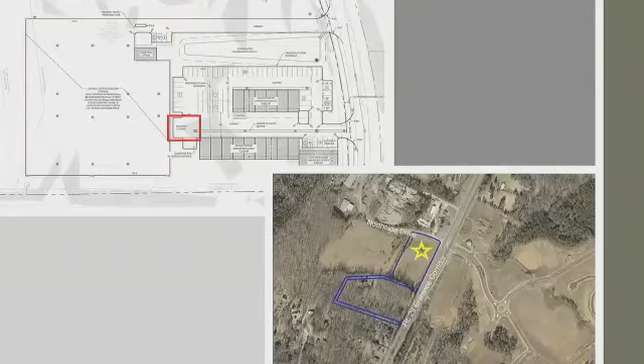Architectural drawings were not submitted with the initial plan, but the site plan shows the backs of the customer lobby and one of the garage buildings will be oriented towards the entrance corridor. Typically, the backs of garage buildings are blank and utilitarian, so careful attention to forms, materials, and detailing will be required. Landscaping will also likely be needed in the available planting area between the building and frontage landscaping to soften the appearance of exterior walls.

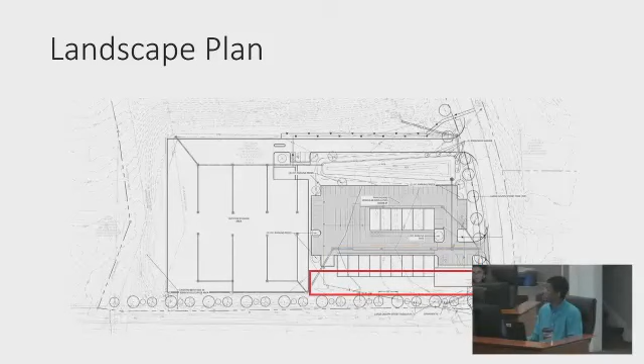Regarding the layout of the site, the outdoor storage area associated with the vehicle repair portion of the development is shown in a location that is along the entrance corridor. Staff recommends moving the storage area behind building D to be more consistent with the guidelines. Screening will also be needed to eliminate visibility from Northside Drive.

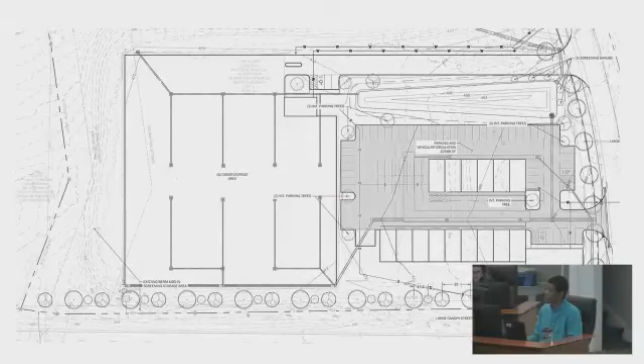There are a few landscaping issues noted with the plan submitted that also will need to be resolved. The frontage trees and some of the interior road trees shown appear to conflict with existing and proposed utilities. The west perimeter parking lot lacks trees due to the stormwater facility being located too close to the lot, and the required amount of interior parking area trees has not been provided.

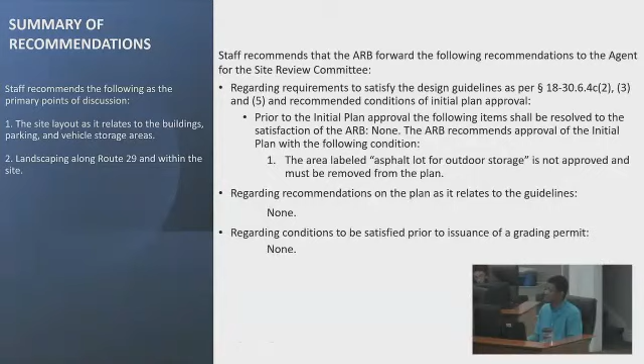Staff recommends approval of the initial plan with a condition: the area labeled asphalt lot for outdoor storage is not approved and must be removed from the plan. I'd be happy to answer any questions you all may have. All right, thanks a lot, Chris.

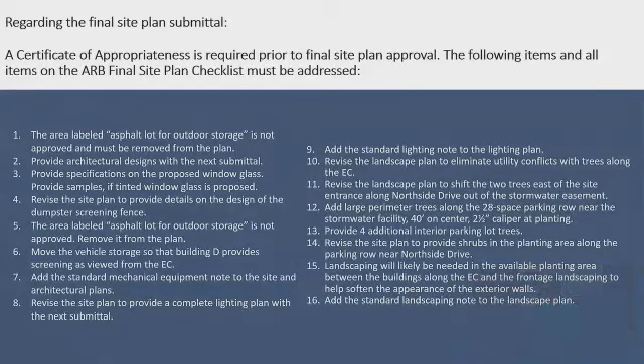We'll go through and see if anyone has any questions. Tara, do you have any questions? No, but thanks, Chris, for your presentation, appreciate it. Dave, do you have any questions? No questions, thank you, Chris.

I just have one clarifying question. The storage area that's not allowed, that's just not a topic of conversation today, like if it was relocated or anything? Correct. The wording in the zoning was that it needs to be consistent in scale with, or associated with, the vehicle repair use; at the scale shown, it's kind of obvious it's not associated with the vehicle repair use. Right, okay, thanks, that was my only question.

Yes, it's time for the applicant's presentation, if the applicant is here and has something to present.

Good afternoon. I'm Daniel with Line and Grade Civil Engineering. I'm a civil engineer, not an architect. I had no other additional information to provide other than what Chris shared with you, but I can answer questions if you have any more specific or context-oriented questions. There's no further presentation.

All right, thank you. So we'll see if any members have questions for the applicant. Dave, do you have any questions? No, thank you, Chris. Tara, do you have any questions?

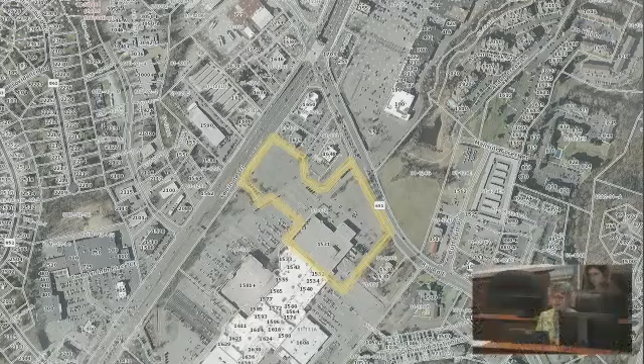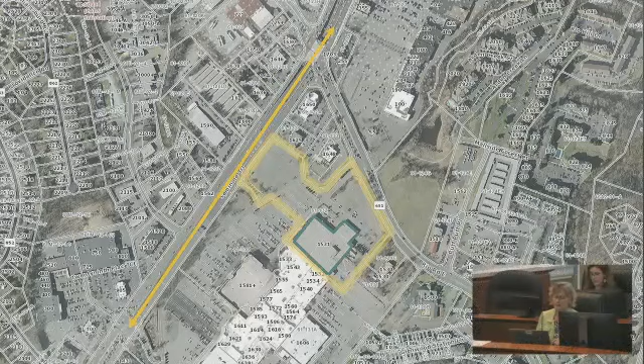All right, our second regular review item today is SP 2023-37, Home Depot Outdoor Storage, Display and Sales. Margaret, do you have your presentation? Yes, thanks. This is an advisory review for a special use permit for the Home Depot store. You'll recall that you reviewed and recommended approval of the initial site plan in May. As a reminder, the site is located at the north end of the Fashion Square Mall, where the Sears store is located. The site falls within two entrance corridors: Route 29 to the west and Rio to the north, and the site is visible from both corridors.

Today, you're considering the applicant's request for outdoor storage, display, and sales of lawn, garden, and related merchandise. Although some of the images in this submittal show the main store building, the design of the main building is not under review today. In September, Home Depot will be back for that review.

One other thing to note: the drawings and the content for today's review of the special use permit evolved during the review of the project, really up to the last minute. So it's possible that I have a few details wrong in the staff report and in this presentation. I apologize for that if that's the case, but I'm sure the applicants will be able to clarify and provide whatever additional details are needed.

This particular SP is required specifically because of the location in the entrance corridor overlay. The review is limited to determining whether the outdoor storage, display, and or sales is consistent with the design guidelines. In other words, will the display result in an appropriate appearance for the entrance corridor?

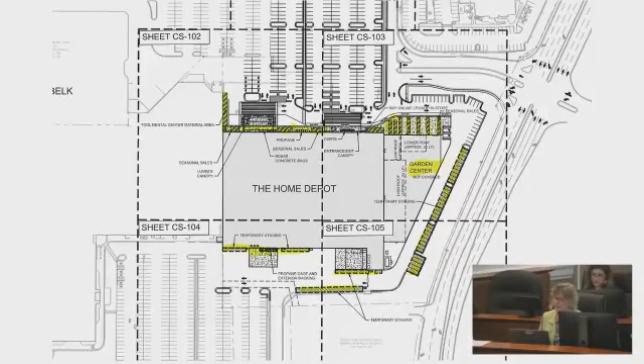The areas of display are the garden center itself, which is adjacent to the Rio entrance corridor, outdoor areas along the front of the garden center and along the main building, behind the building, and extending for a short portion along the existing building. The areas behind the building are not expected to be visible from the entrance corridor. A view down onto the garden center is expected from the sidewalk along Rio Road, much as the current view is down onto the Sears building.

The outdoor areas are expected to be visible from Rio across the entrance into the site and from Route 29, though that would be at a distance. The garden center has an entrance feature on the Route 29 side and fencing that extends from the entrance feature to both sides to enclose the garden center area.

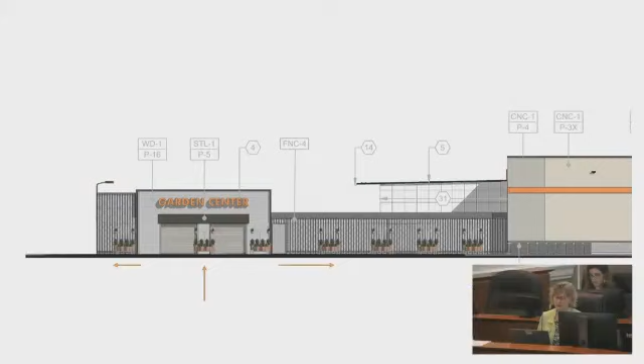The fence design changes depending on location. Materials include vertical metal fence, expanded metal mesh, black fabric mesh, and black chain link. Not every material is used in every application, and when multiple materials are used, they are sort of sandwiched together. The chain link is used as part of the composition at the upper part of the fence on the side that parallels Rio Road. The layered design could sufficiently reduce the noticeability of that chain link.

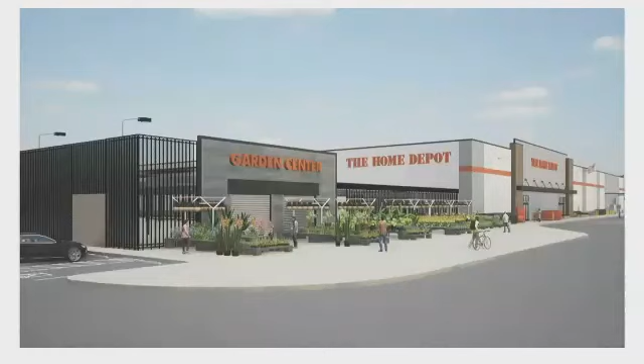Because the design uses chain link, because this exact fence design doesn't yet exist anywhere that can be viewed, and because there will be some visibility through the fence into the garden center, we recommended that a mock-up be provided for ARB review. We recommend that it be provided prior to building permit approval, but you may prefer an earlier deadline.

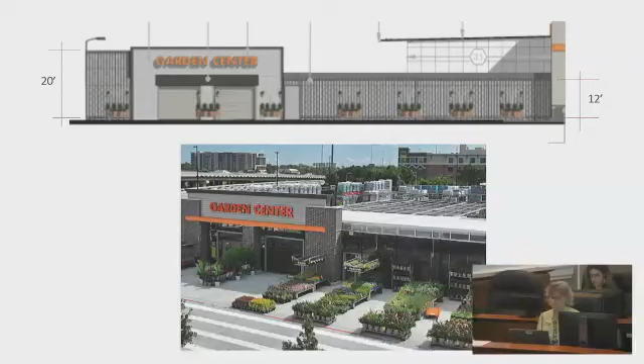Another fence-related issue is the height of the fence. It's 12 feet tall on the Route 29 side of the building and 20 feet tall on the Rio side. Some garden centers stack products higher than the fence that encloses the space. This creates a disorganized, disorderly, and unattractive appearance, so limiting the height of stored products to the height of the fence would be appropriate. But the fence heights vary here, and depending on layout, products stored at the taller 20-foot fence height might be viewed above and beyond the 12-foot fence.

Viewers would probably need to be standing at a distance to see that condition, but a consistent fence height could resolve that problem. We've recommended a condition of approval that products must not be stored higher than the shortest garden center fence.

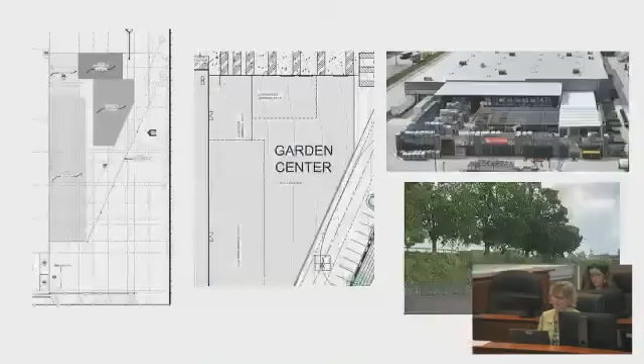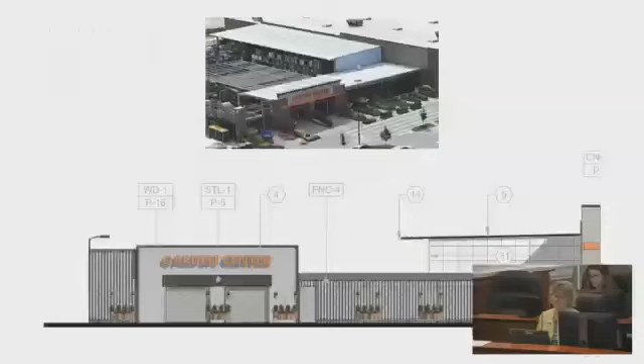The garden center is partially enclosed at the top. The elevated position on Rio Road above the site will allow the enclosures and the interior areas of the garden center that aren't roofed to be visible from Rio Road. The enclosures are a combination of retractable black mesh over the central area and white pre-finished metal canopies set at varying heights. A portion of the garden center is enclosed with vertical translucent fiberglass wall panels.

The fiberglass will appear to glow when lit from the interior at night. That's an effect that would not be appropriate for the entrance corridor, and a change to that material is recommended.

The garden center is part of the Home Depot big box design. It's a version of a trademark design. The garden center and the display have no connection to the historic architecture of the county. Given the immediate context, that connection may not be as important as some of the other aspects of the design.

This redevelopment, however, is an opportunity to meet the guideline that states that landscaping can provide continuity along the corridor and allow for more flexibility in the building design. Route 29 does not currently have any of the standard entrance corridor frontage planting on this parcel. Given the extent of the redevelopment and the requested special use, we've recommended that the planting be provided.

There are a few other landscaping issues. One is screening proposed along the Rio Road frontage to address the visibility of the storage and display. The Rio frontage is relatively narrow. It includes a planting strip with a guardrail at the street edge and some existing mature trees. There's a sidewalk and then another guardrail before the ground falls away with a steep slope down to the mall parking lot. For the screening along the Rio frontage, there's a landscape proposal and a buffer alternative.

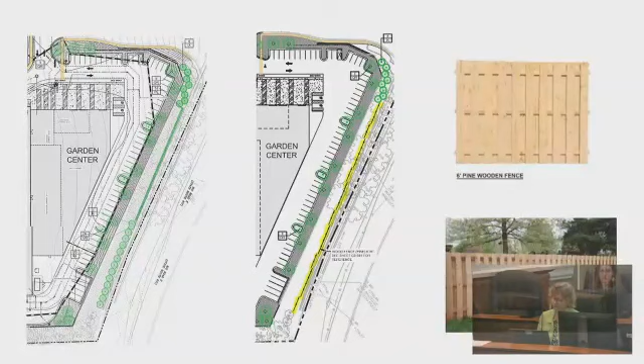The buffer alternative consists of a solid wooden fence. The fence of that design would be out of character in this location, and we've recommended a landscape-only solution. However, there is concern that there's not sufficient planting area to accommodate the landscaping that's proposed, so we've recommended that a detail be provided to show that it can be done.

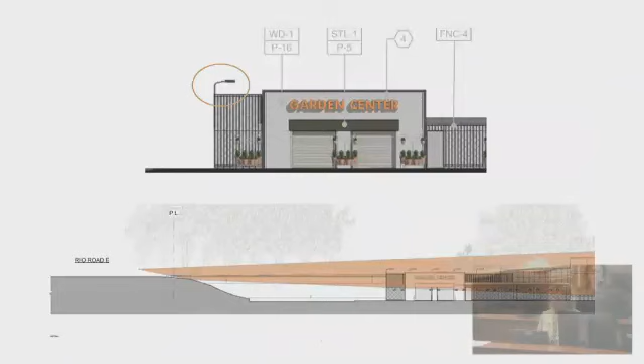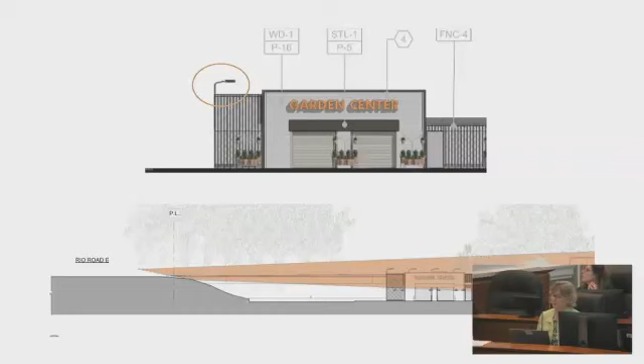There are a few lighting issues related to the outdoor display. There are fixtures mounted at the top of the garden center fence pointing down into the garden center. Those fixtures are proposed with a color temperature of 4000 K, which exceeds the guidelines. There are no light fixtures shown illuminating the exterior of the garden center or outside storage areas. To ensure that the display areas are not over illuminated, we've recommended that outdoor illumination be limited to 20-foot candles maximum, which is typical in the entrance corridors.

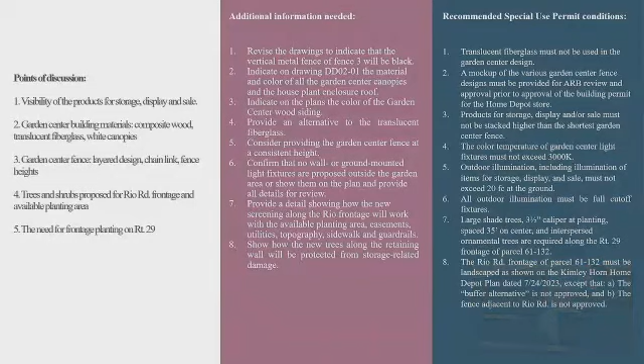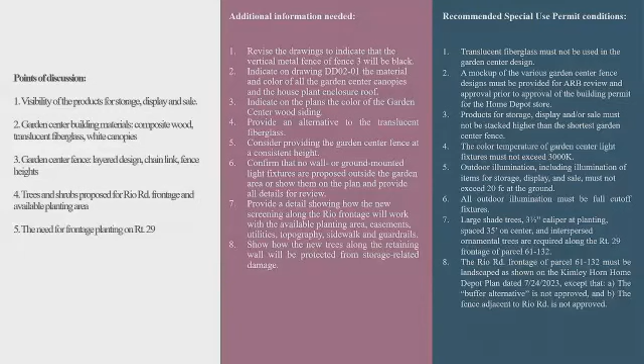That covers most of the issues identified in the staff report. Your recommendation on this proposal will be forwarded onto the Planning Commission and the Board of Supervisors. In the staff report, we listed two sets of comments. The first is recommended additions or changes to the drawings to clarify points of design and confirm that an appropriate appearance will be achieved. With these requests for outdoor display, typically when changes are needed in the drawings, we recommend that you see the revised drawings prior to taking action. If you don't feel those issues identified in that first list are that significant, you could forego them or leave them for staff review prior to the proposal moving on to the Planning Commission.

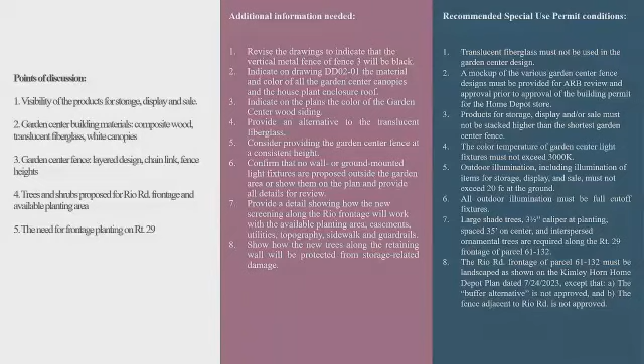The second list is recommended conditions for the special permit. They aren't necessarily changes that need to be made to the plans right now, but are conditions that would run with the special permit. In addition to general discussion about the proposal and its visibility, there are a few specific items we recommend you include in your discussion today: the building materials, including the fence designs, the available planting area along Rio Road, and the need for frontage planting along Route 29.

And that is the end of my presentation. I'm happy to answer any questions that you might have.

All right, thanks a lot, Margaret. Tara, do you have any questions? No, thank you, Margaret. Dave? Thank you, Margaret, for the thorough report and presentation. No questions.

Thank you, I guess I had one question. The translucent fiberglass, it looked based on some of the images that it occurred on some of the roofs also, is there a problem with that, or is it just that vertical expanse of it? It was my understanding that it was just that vertical piece that was translucent, and that the roof pieces would be opaque, but I'm sure the applicants can help us with that. All right, thanks, that was my only question.

So now is the time for the applicant's presentation, if there's a representative here.

Good afternoon, my name is Corbin Rowe. I'm the real estate manager for Home Depot Northeast US. We've been looking to get a store here in Charlottesville for almost 20 years now, so a long time in the making. We're happy to be here in front of you considering the site plan and everything about it. I think the team we have here can answer all of your questions and go through it, and we appreciate the opportunity to listen to us. Thank you. All right, thank you.

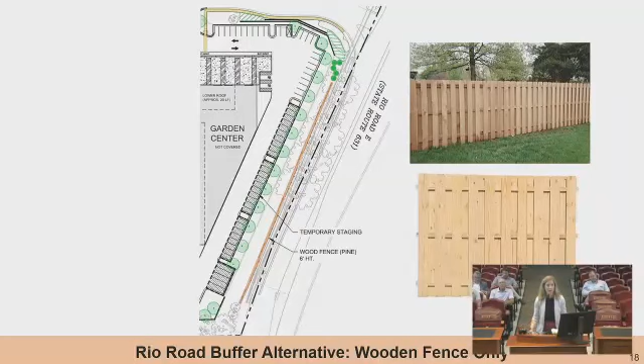But if it were the preference of the ARB and ultimately the Board of Supervisors that visibility of the garden center and display products be completely eliminated, there is an option for that with this wooden fence or some other material. We did not expect that would be the preference, but wanted to show it as an option if preferred.

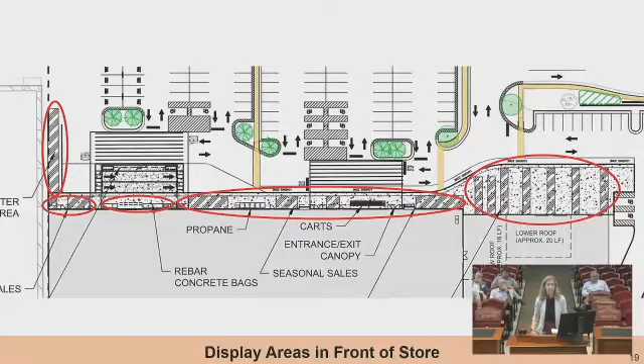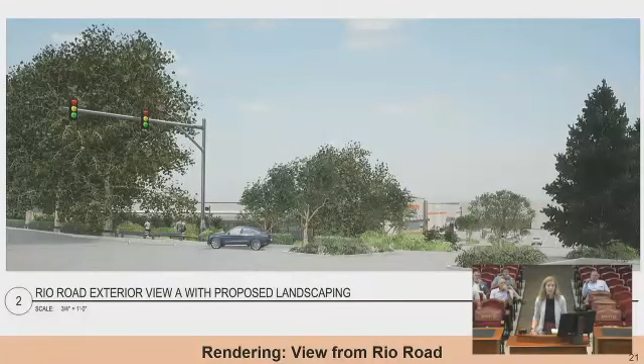As you can see, that does help fill in those gaps a little bit, but certainly the store and portions of the garden center fence will still be visible. I think the views will be mitigated substantially with the combination of the new plantings as well as the proposed materials.

Just wanted to show all the elevations. We're happy to come back to any of these where you may have questions.

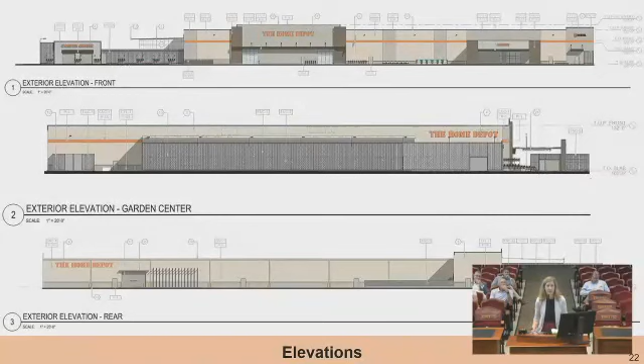I'm going to be talking about the fencing. This is the view from Rio, with a certain design of fencing here, and a slightly shorter fence here, as Margaret noted, with a slightly different proposal there. And then finally, this is the tool rental center I mentioned, which might be visible at a distance from Rio because it's up against the old existing Sears building.

Again, this is the fence from the front elevation, and from the side, looking at that tool rental center in the distance. One element, which I'll show you images of to explain, is this fence will have two layers. The difference between the two is that on the bottom half, there is some security metal mesh fencing.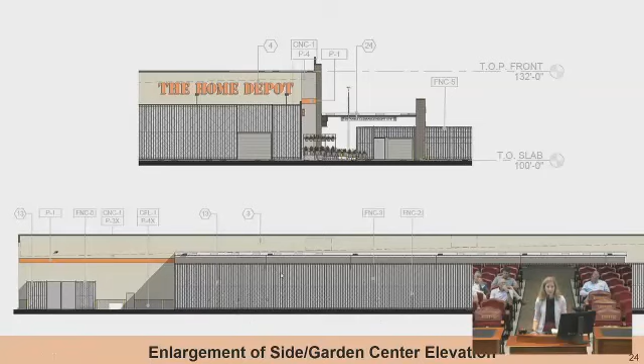I have a close-up image - it's kind of like a very tight weave chain link. On the top will be chain link. Both will be coated in the black material. We'll also have a vertical decorative metal fence along the entire span.

The challenge is I don't have a picture to show you exactly what Home Depot is proposing for this site, because they're proposing something they've never actually built anywhere else. So what we're trying to do is show you various combinations and ask you to understand how it would look. On the far left is a picture of a fence with the vertical metal fencing and the chain link behind - this is the tight weave security expanding metal mesh, a close-up of it.

This is the front of a store. You can see again, the frame of reference is the panel we'll talk about in a moment. This material only is on the front of the store. I think it does a good job of showing how that material helps screen and minimize the view into the center itself. And finally, some black metal mesh material would be added to the side of the fencing on the Rio Road side to help further screen the materials. So then I'll walk through each option.

This is the tool rental center that's just to the right of the front. You'll see this at a distance, but it would be visible.

On the bottom is this metal mesh security fencing. On top is the chain link, and then the metal mesh behind. It will also have the vertical metal decorative fencing. So there are 3 layers: the metal vertical decorative on the outside, the chain link in the middle on the top half, the expanded metal mesh in the middle on the bottom half, and the black fabric mesh material along the entire portion of the fence. That's the same sequence for the large side along Rio Road.

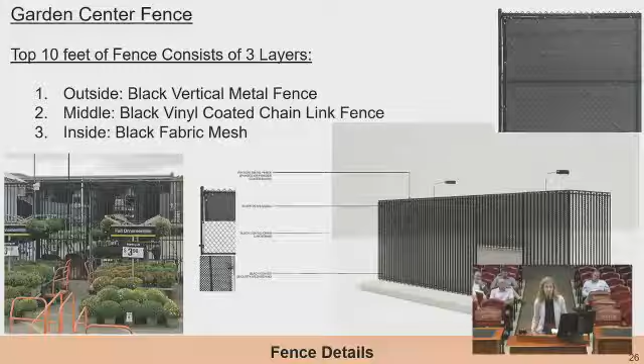This is some close-up photographs from the Waynesboro store that I took to provide local options. Obviously a very different store - they don't have an architectural review board, so those orange panels are not proposed. I wanted to show what the metal mesh looks like up close.

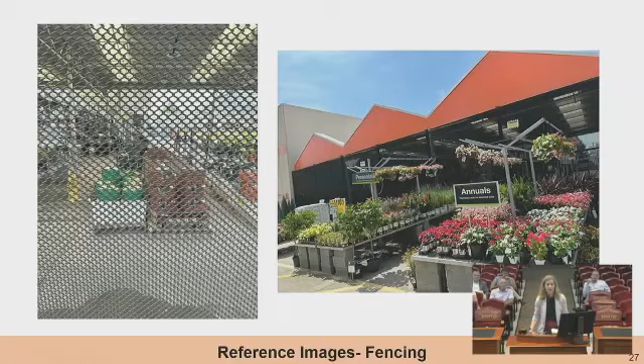This picture was taken from this exact spot, looking in, showing that it does help mitigate the views into the garden center, particularly from a distance where it appears darker.

These are photos of the fencing in Waynesboro, very different in many ways from what's proposed here. Most importantly, this does not have the vertical metal decorative, nor does it have the black mesh material on the inside. But this is what would be in the middle at the store here in Charlottesville - you can see the difference.

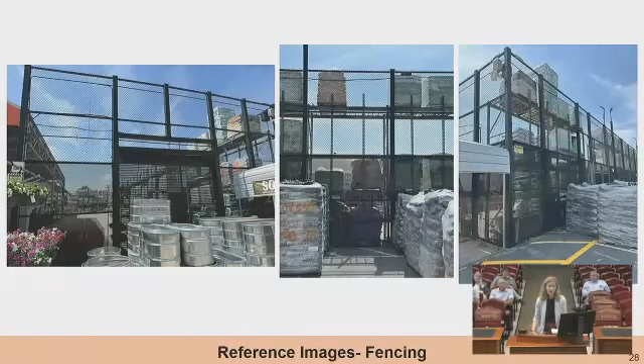This is the metal mesh, tighter weave on the bottom, and standard chain link on top, both in black. So this would have the vertical decorative metal fence on the outside, this material in the middle, and the black mesh fabric on the inside. I wanted to show this as an example of how it looks from a distance.

Here's some temporary staging. There was a question about trees being located next to temporary staging areas, so I took some pictures. It's not always very tall things - sometimes it's smaller items like that.

This is taken from inside the store at the Garden Center in the Waynesboro store. The material for the roofs over the Garden Center would be a white metal material with translucent fiberglass inserts as shown here. I recognize we did not clarify that in our application materials. We have the architects from Home Depot here who can talk more about why they proposed that alternative - it allows light to come through for the plants and other materials, helps reduce electricity costs, among other things. That is what we're proposing, and we appreciate your feedback on that.

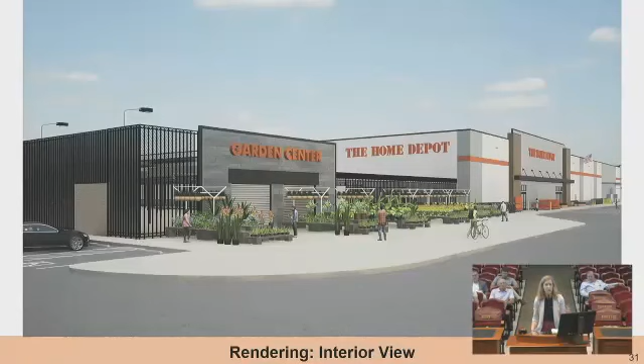This is a rendering of the Garden Center with the proposed materials. The fencing along the front - this is a 12-foot fence - and this segment of the front fence, which is 20 feet, would have the vertical decorative metal on the outside and the various types of chain link, the smaller security mesh on the bottom and the standard chain link on top. These segments of fence would not have the black mesh material, since Home Depot wants customers to be able to see in a little bit as opposed to screening it entirely. By contrast, over on the Rio Road side would have the black mesh material to help create much more of a screening of that area.

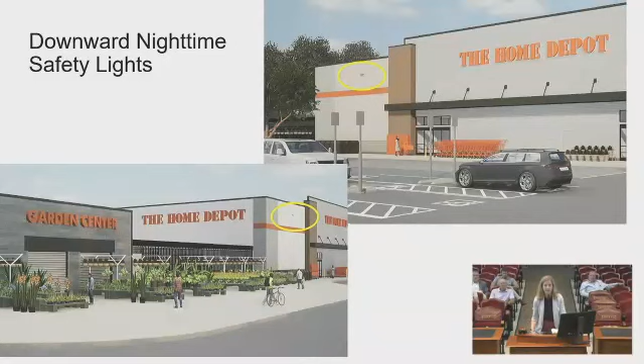There was a question about whether there were any lights on the building to illuminate the display items. There are not - there is standard wall pack lighting for safety. We can call those out on the plans, but they're not intended to illuminate the display items.

This is just some images of another store to help better demonstrate the relationship of the canopies, the various heights, and the materials relative to the Garden Center entrance. Again, this is that same material - the small mesh security and expanding metal mesh material along the front, much as it is at the Waynesboro store - just to give an idea of how that works.

Home Depot does have concerns about having a uniform fence height around.

They like the idea of having it vary in height, shorter here at 12 feet in the front, then going all the way around at 20 feet above. That allows them to stack materials without exceeding the top of the fence. Over here, where they're not stacking materials, there's a roof, so that's not an issue, and it won't be as imposing a height on that side of the building.

I think it would be challenging for someone standing over here, or further back, to see over this fence and roof to the materials at the back. Certainly if you're walking from Route 29 you may see them at a distance, but we think all the various measures together, including new trees, will help mitigate that visibility.

This is a similar image to what you'd see from the Rio Road vantage point, very similar in terms of roof canopy location and structure. That one looks a little blue on the roof, but it would be white. And again, a different angle showing that.

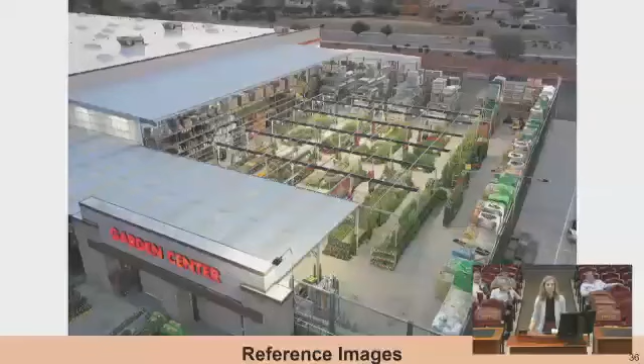In some of these images, Home Depot shared with me that the roofs, or canopy covers, look brighter. Part of staff's concern was that they would glow at night, but I'm told these images were intentionally taken at dusk, when it would be most visible, because they like to show it that way. It would not necessarily be the same with the Charlottesville store. I just wanted to point that out.

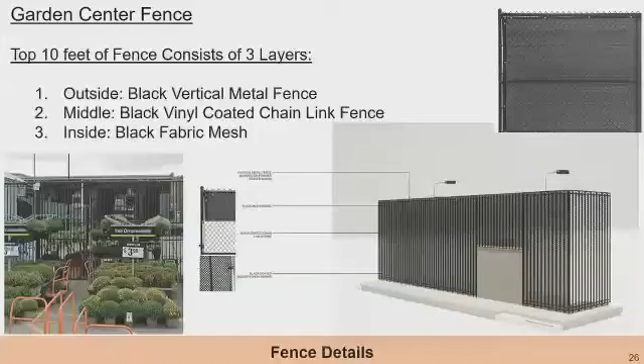I think that's everything there. I do have a couple of responses to some of the staff comments, if now is the appropriate time. There are many we're comfortable with, a few we'd like some modifications to. I'm happy to answer questions first or go through those, whichever you prefer. I think if you want clarifications, that might eliminate unnecessary questions. So, I've covered some of them already.

The first is about the comment on this translucent fiberglass material here. Staff recommends it be replaced with a different material, out of concern that it would appear to be glowing from the entrance corridor. I'm happy to have the Home Depot reps and architects address that issue, but we think it will be okay.

The lighting inside will not be uplit toward that panel, it'll be downlit into the store. The translucent material helps allow light in onto the materials and into the garden center during the day, reducing electricity use. If the panel is visible from Route 29, it will be at quite a distance, over 700 feet, and there will be a number of new trees planted in the parking lot that aren't there now, as well as shrubs, possibly trees, along Route 29. So we'd like to leave that material if possible, and we'd appreciate your feedback on that.

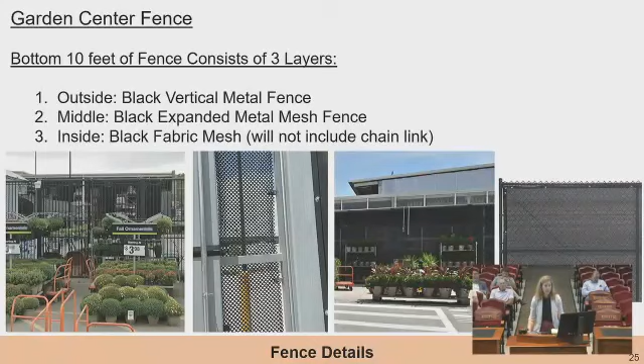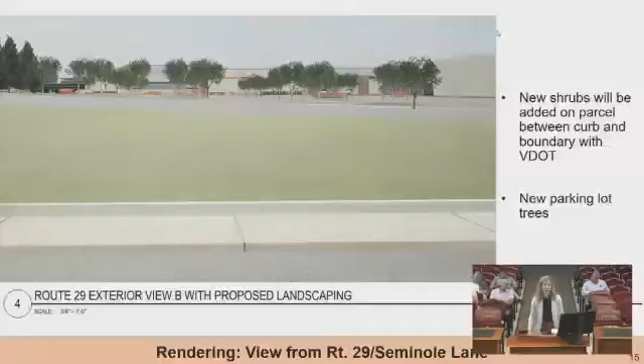I talked a little already about trees along 29, for Mr. Stoner's benefit I'll go back to that slide, right here. Much of the green grass strip that currently exists between the Route 29 northbound lanes and the parking lot is just grass, with no plantings of any kind.

Much of that area is in the VDOT right of way, so what we're proposing, at minimum, is to put some shrubs within the space between the right of way and the edge of the existing parking lot, or trees if possible. The rest of the mall will be redeveloped as part of the next phase. So we're trying to avoid, one, the challenging constraints of the right-of-way location, and two, tearing up that parking lot unnecessarily and putting something back that would just be torn up again in a few years. We'd appreciate your feedback on that issue.

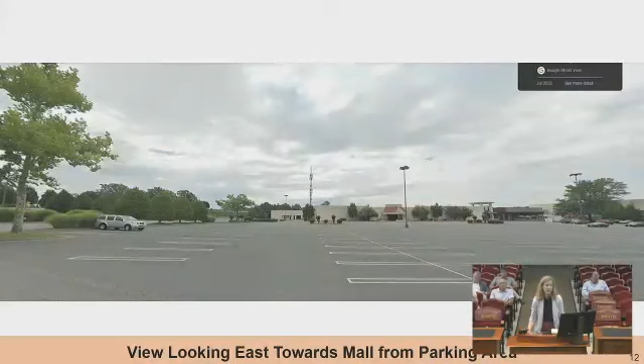So that was on that issue. We'd love your feedback on that.

With regard to the two lighting issues, one was about the color temperature, whether it was 4,000 Kelvin or 3,000 Kelvin. They would prefer 4,000. They tell me that's fairly standard in commercial projects. The 3,000 is what you're looking for. I think they can make that work. They may want to talk with you a little bit more about that.

And then with regard to the limit on foot candles, whether it's 20 or 30, I noted in the guidelines that it does say up to 30 is appropriate for display lots. So we would like to maintain 30 foot candles along the front display lot.

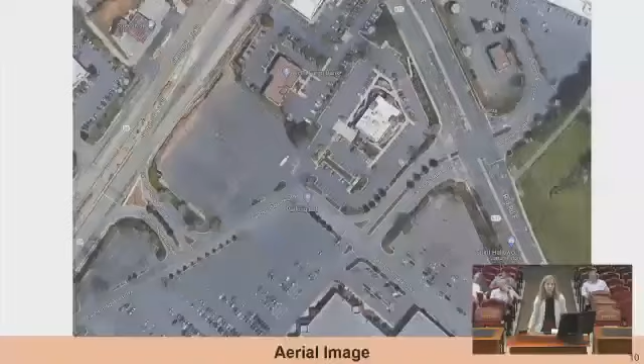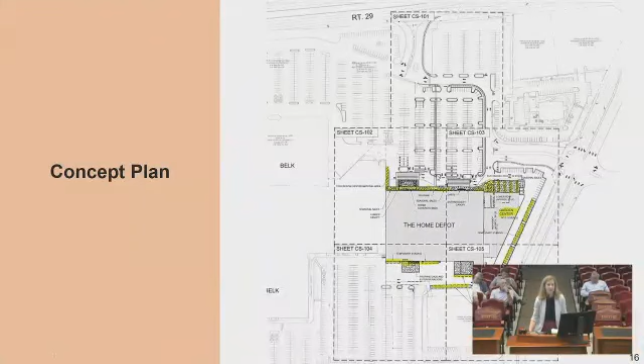Let me go back to that image. It's fine to have 20 in the other locations. So we're asking to maintain 30 in the front, just because you have staff members and the public coming and going in the evening. You have a travel way here, there's curbs, materials in there. We think for safety reasons it's more appropriate to have 30 foot candles there. It's not intended to be about lighting the display items, but for safety. By comparison, these areas in the back, 20 is fine because most of the work involving those temporary staging or storage areas takes place during the daytime, and they don't have as much traffic flowing in front.

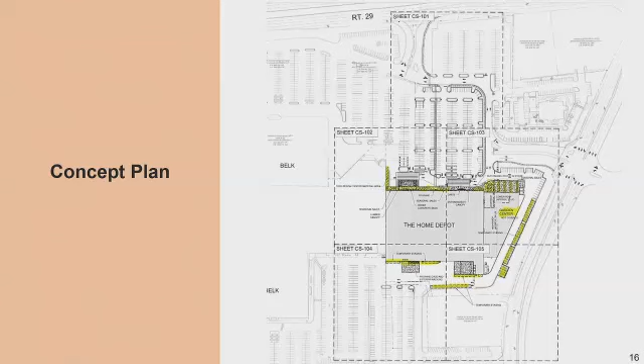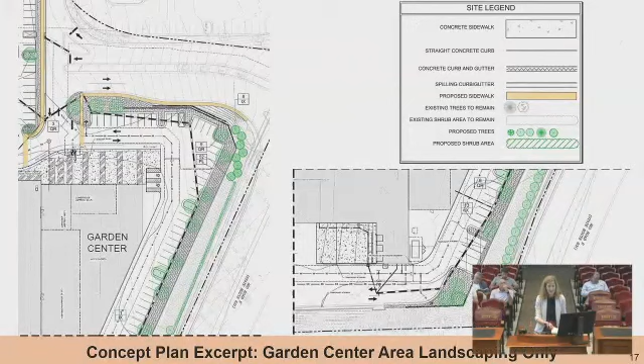We talked about the roof material a little bit already. We'd like to be able to use the same white metal roof with the translucent fiberglass insert panels to allow the light in. Again, the lighting is not uplit, it's all downward facing. So while the roofs would be visible, we think they can be mitigated with the existing and proposed additional landscaping. We would welcome your input on that.

And regarding this planting area along Rio Road, Kimley Horn, the project engineers, have confirmed they are very confident that what they propose, there's room for it. They've taken into account both the underground utilities and the overhead utilities. These will, obviously, my cursor—

There. These are small shrubs that can work in that location. And then there's one holly here, and then that row continues here. This is where the maple trees don't currently exist, largely because of the overhead power lines, but these hollies can be planted. The height at planting can help mitigate the views of the garden center, but even though they'll grow to a nice height, they won't interfere with those utility lines.

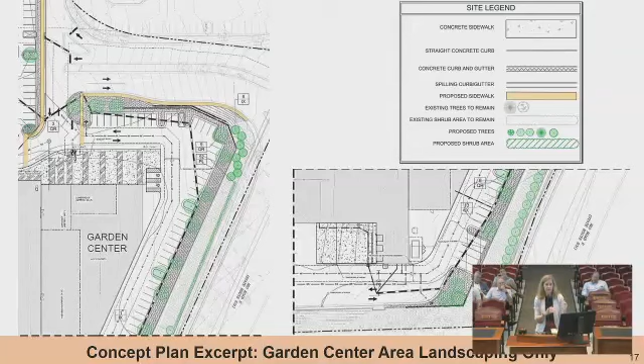And then we talked about the fencing. We prefer to not have them be uniform, but to keep 12 feet on the front and 20 feet on the Rio side. And then finally, the suggestion about limiting stocking of products against the fence to the height of the lowest fence—we would ask that instead, the product not be stocked above the top of the fence. So on one side, they could be stocked up to 20 feet on Rio, and no more than 12 feet on the 29 side.

I think that was everything. Again, I'd be happy to answer questions or call on our team members as needed.

I should have introduced our team too, if you forgive me. So you met Corbin Rowe, who's the manager for real estate. We also have John Karakis with Greenberg Farrow, who is Home Depot's architect, Dan Boyle with MG2, also part of the architecture team, and David Ellington with Kimley Horn, Civil Engineer. So they can also answer questions, likely better than I can.

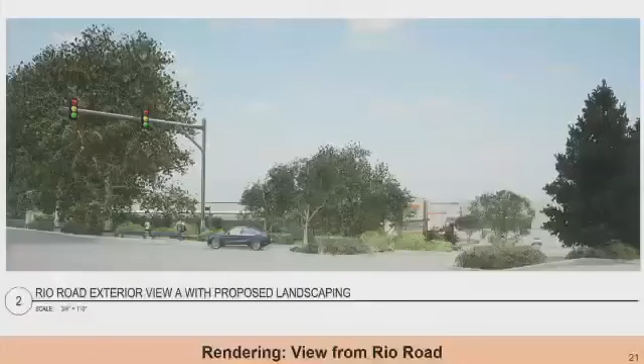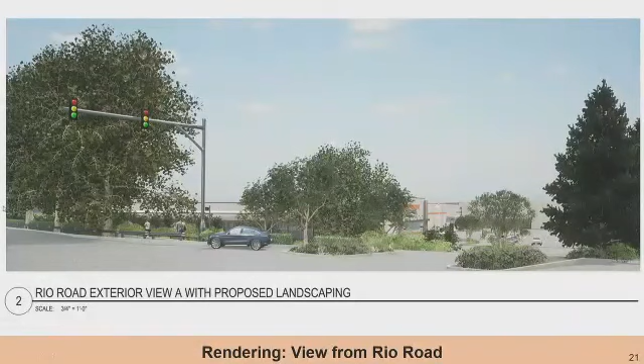There's one, that's at the entrance, showing both the existing and proposed new plantings. I do not have one further down in that location. This is what we have from here, and then we have another from Route 29, somewhere in here.

The laurels being proposed are skip laurels? English laurels, I believe. How tall do they grow? Let me get you the precise species first. Oh, what did you say, Skipper? Skip laurels? Yes. Skipper English laurel. I wasn't sure how to pronounce that.

Regarding height at planting, the laurels would be 3 feet at planting, and I'm told they grow up to 5 feet. Regarding the hollies, let me go back to that image. These hollies here along there, and then one at the match line, those would be 6 to 8 feet at planting, and I'm told they will grow to 15 feet, growing about 1 foot per year.

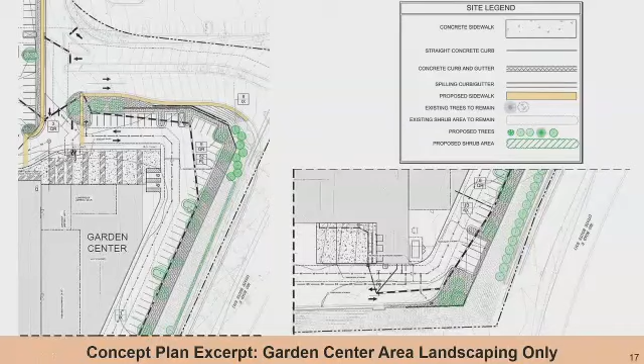If it's helpful to know, these oak trees shown are a new planting bed at the bottom of the hill in front of the parking lot and a few in the parking lot islands. Those oak trees are not intended for screening the outdoor storage and display component of the project, but are required by the site plan, so we wanted to go ahead and show them. They'll eventually grow, but they're at a much lower elevation. Does that help? Great, yes. Thank you. All right, thanks.

I do not have any questions. Okay, so we will find out if there are any members of the public that want to make a comment. I do not have anybody on the Zoom side. All right, great. There doesn't seem to be anyone in person with any questions. So the ARB will now go into discussion.

Dave, do you have any comments for the applicant? Sure, thank you, Chris. I appreciate the presentation. In terms of the translucent panels, I'm sympathetic to the idea of having some daylighting of the space, and with proper lighting I agree probably that they can be appropriate. If the applicant were able to provide a lighting simulation, that would be satisfactory from my perspective.

In terms of the trees, I appreciate the parking lot trees, I think those will be a big improvement where proposed. I would appreciate further detailed study of locating large trees by the entrance corridor. I think it may be feasible from looking at a high level at the plans, but would appreciate that. I think it would be a big improvement to the corridor.

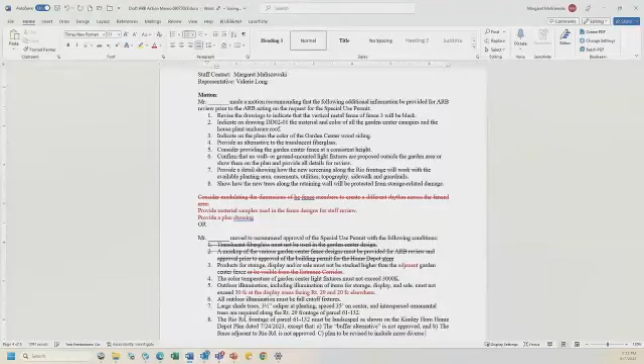And then I think number 8, we would just be requesting that the proposed species be... well, the plan be revised to include more diverse planting. Certainly the one that's proposed is fine, but others in addition to it.

Could make that a consider and not a requirement. I think it would be nice, but if it's a consider, it doesn't need to be in the special use permit conditions. The guidelines also normally have percentage requirements, and there's a lot of planting around the parking lot, but it looked to me like maybe as proposed that one shrub wouldn't necessarily meet that diversity.

Yeah, so I think as Margaret has it now, that's an agreement.

Does anyone have any additional items to add? Quick question with regard to spacing along 29 and how this compares to other site plans with frontage on 29 that have been approved, just in terms of the spacing of trees to be planted. Well, the entrance corridor requirement is 35 feet on center, with large shade trees and interspersed ornamentals.

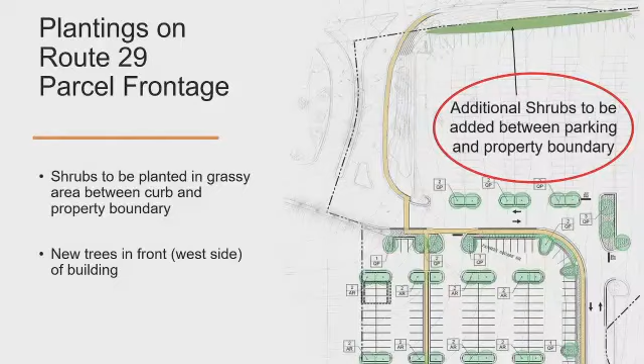Margaret, do we want to look back at the motion? I guess in terms of item 7, it sounded like the applicant is prepared to put in entrance corridor canopy trees to the maximum extent feasible. Without—I guess my perspective is, if we know that's going to be redeveloped, which it sounds like, that parking lot's going to get torn up, there's going to be an opportunity for a much more cohesive, attractive landscape. It's building 700 feet behind it. I just think it's premature.

I appreciate that perspective, and I hope it gets redeveloped quite soon. I just think the canopy trees along the entrance corridor are one of the greatest sources of continuity and character. While we haven't been shown a detailed site plan, there does appear to be some space, and a 3.5-inch caliper tree does not take a tremendous amount of space to place. I think it's a reasonable request and not a significant one. Certainly, what I'm proposing is that if the applicant can demonstrate there's not space, I think staff could accept that, but I don't feel that's been demonstrated yet.

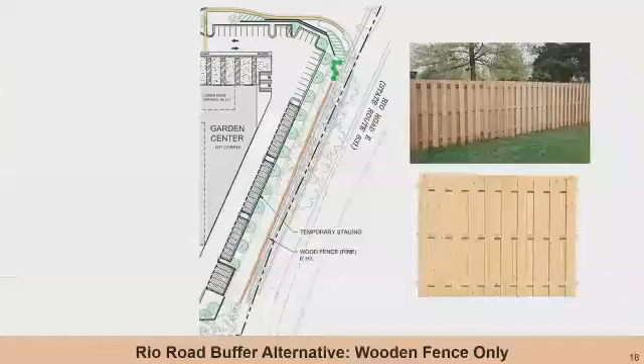A couple things - someone just pulled up the aerial images from VDOT's website. Apparently, when the grade separated interchange was installed, there used to be trees along that frontage. They apparently took them out when they widened the road and installed the very beginnings of a retaining wall. That shows up in one of these images - no, not there, pardon me, let me get to the right one. There's a retaining wall that starts, it doesn't show up in this image, but kind of right about here, very low, and gets higher as you approach the interchange. According to the historical aerial images our team member pulled, they were there, they were just removed.

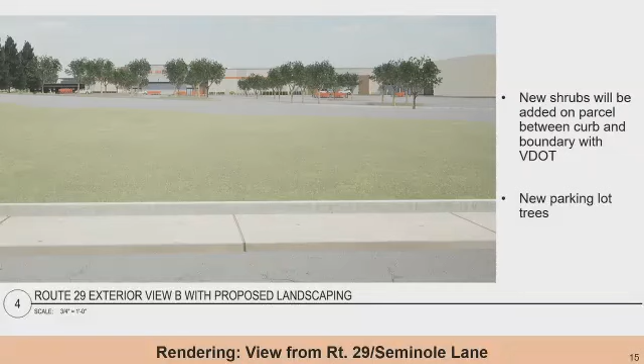Regardless, we certainly appreciate the comments, Mr. Chairman, and appreciate your flexibility, but we also understand it's a pretty obvious gap in any planting - it doesn't look great. Home Depot is willing to put in whatever they can within the space between the right of way and the existing parking lot. If they can figure out how to comply with number 7 exactly, they'll do that, but we're not certain we can. We can certainly put in shrubs and as many trees that fit the standards as possible, a mixture of large shade and ornamentals. It just may not be what they'd do if they had more room to work with - kind of like on Rio, we're trying to do everything we can within the constraints we have. It may mean that gets torn out later when the mall is redeveloped, but maybe that's better than nothing - at least it would look a little better in the interim.

Thank you. Thank you.

But it sounds like the language we have will work. So can you live with 'or plantings as acceptable to the ARB' addition? I think so, if it's just clear that they don't need to tear up the existing parking lot, between the right of way and the existing parking lot, if we stay within that area. Okay, yeah, thank you, thanks.

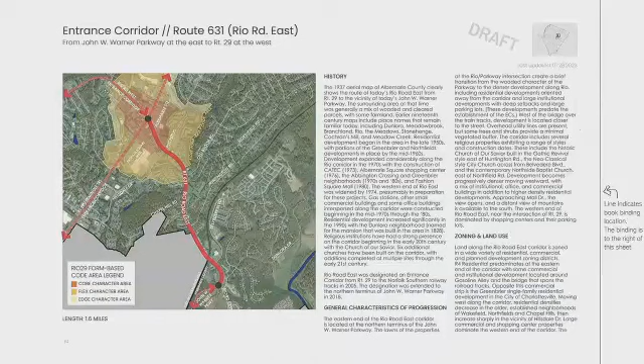In terms of general characteristics of progression, the eastern end of the Rio East corridor is located at the northern terminus of the John Warner Parkway. There are some lawns on the properties in that area that create a transition from the wooded character of the parkway to the more dense development along Rio Road. This includes residential developments oriented away from the corridor and some large institutional developments with deep setbacks and large parking lots, typically predating the establishment of that entrance corridor.

West of the bridge over the train tracks, development is located closer to the street, and trees and shrubs provide a minimal vegetated buffer there. The corridor includes several religious properties exhibiting a range of styles. We identified 7 churches along this corridor, and we point this out because the buildings tend to have unique transportation patterns and architectural designs with features more visible from the corridor, like enhanced entrances and enhanced roof lines.

Development becomes progressively denser as you continue to move west, with a mix of institutional, office, and commercial buildings, in addition to some higher density residential developments. Approaching Mall Drive, the view opens and a distant view of mountains is available to the south.

The western end of Rio Road East near the intersection of Route 29 is dominated by shopping centers and their parking lots. The zoning in the area has a wide variety of designations corresponding to that wide variety of development that we've just described.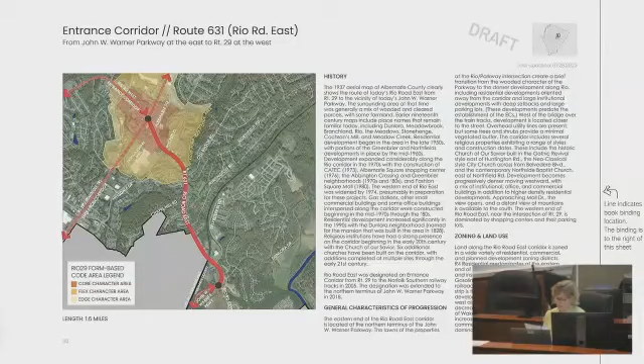Approximately half a mile of the western portion of the corridor falls in the Rio 29 form-based code area. The 3 distinct character areas are depicted on the map in this case to help users better identify what to expect or what the vision is intended for those areas.

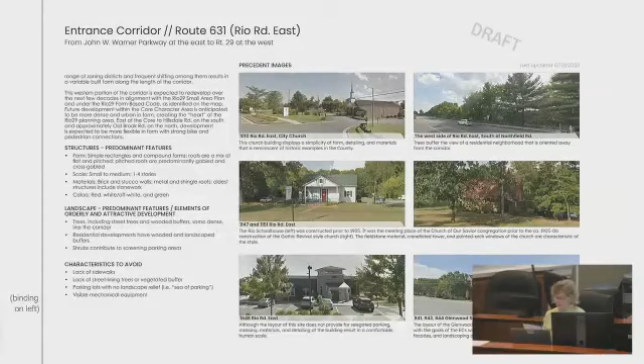In the precedent images, we highlight historic buildings and forms, as well as newer office and commercial developments that try to integrate the street, vegetation, as well as human scaled massing. Here we have a more detailed list of predominant structural and landscape features. Some unique aspects along the corridor were continuous sidewalks and trees and wooded buffers lining the corridor.

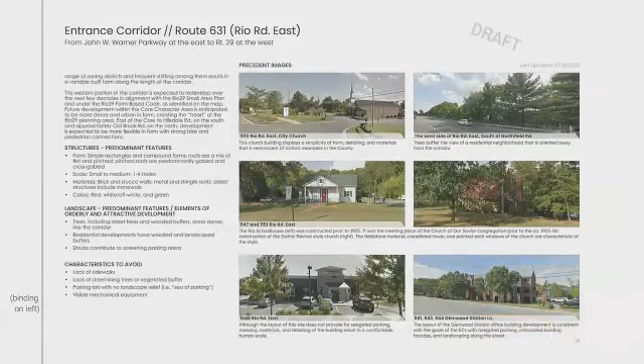But that's just a quick intro. I'm happy to have any comments that you like. All right, thanks a lot, Margaret. Guess we'll just go right into discussion. Tara, do you have any comments?

I thought, I guess Mariah wanted to watch this later. She can know that it looks nice. Thank you, and thanks for your help as well.

But I guess the only thing I thought was that we've been talking about it for like an hour and change, but the Fashion Square Mall is also part of this corridor. So I think including it with some commentary on the list of images seems appropriate, even if it's indicating some of the aspects that aren't in accordance with the current entrance corridor guidelines. I think last time we talked about mechanical equipment and various things like that. But otherwise, I think it looks great.

Thanks. Frank, do you have any comments? Yeah, I also think it looks great. There are a couple notable exceptions on the east end of this corridor that might want images, the church being one. So the Covenant Church, which is adjacent to Belvedere Boulevard there, and then CATEC on the other side. That sort of node isn't really represented.